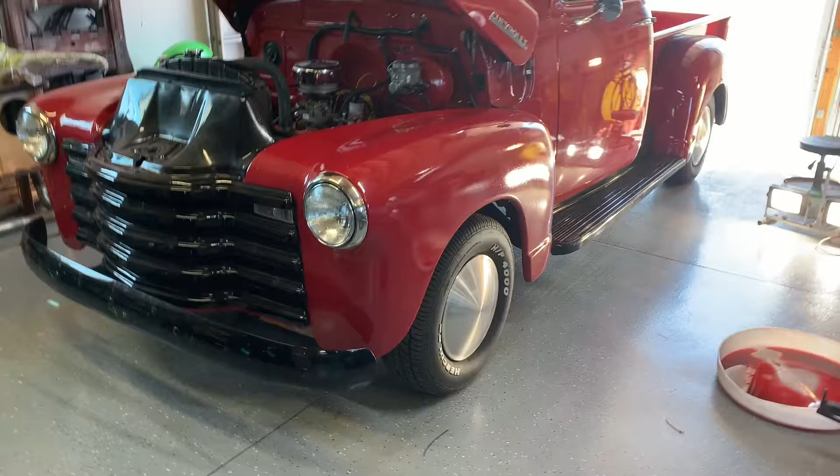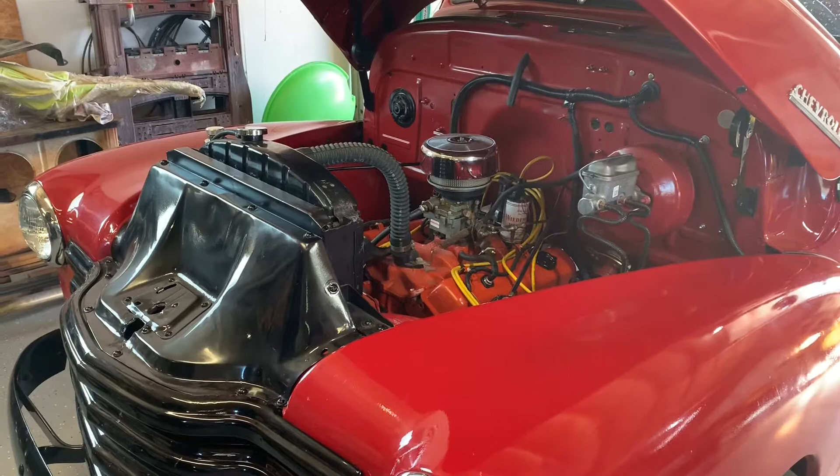Okay guys, well, it's been a month since my last video. Now, it didn't take me that long to get the transmission in. I had it in and bolted up in that first weekend of the original video, and I published it. So I got it the following weekend. I got it all buttoned up, got oil in it, and was driving it, and that's when I started having some issues.

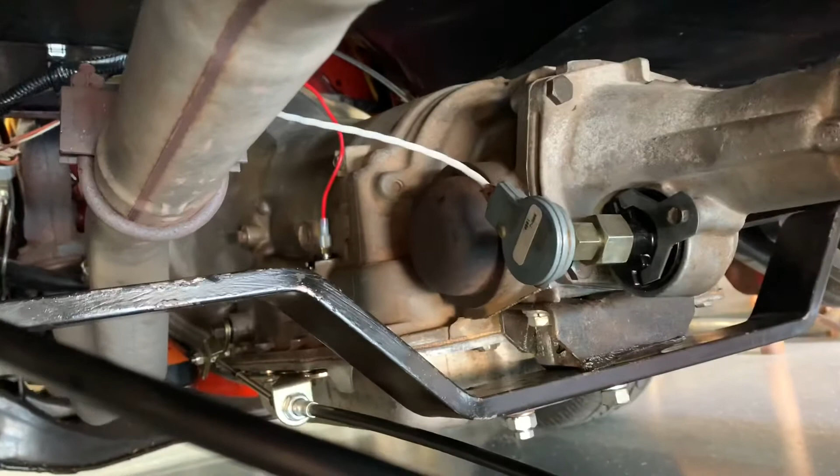I had a problem with my torque converter lockup circuit. Let's see if I can get this under here. You can see everything here. So you kind of see that red wire in the distance there. There it is. There we go. All right, so there's the red wire. That was a white wire. It's a 14 gauge wire with a 15 amp fuse, and it runs through a rocker switch on my dash with a LED light indicating that the circuit's got power.

This is the simplest lockup system that a person can do. They get complex after this, where it all does it automatically with vacuum switches and brake switches and all kinds of doodads.

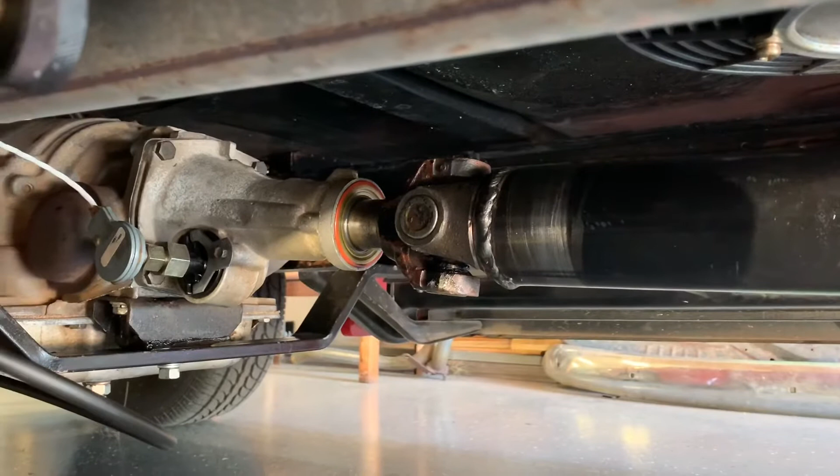But anyway, there's my drive line I got cut down. The transmission is 3 inches longer than the original Turbo 350, so it's kind of a neat thing with the 700R4s. They're all the same length. The Turbo 350, you could have 3 different tail pieces on here, you got like a short, medium, and long tail shaft. So I ended up having to cut 3 inches out of mine.

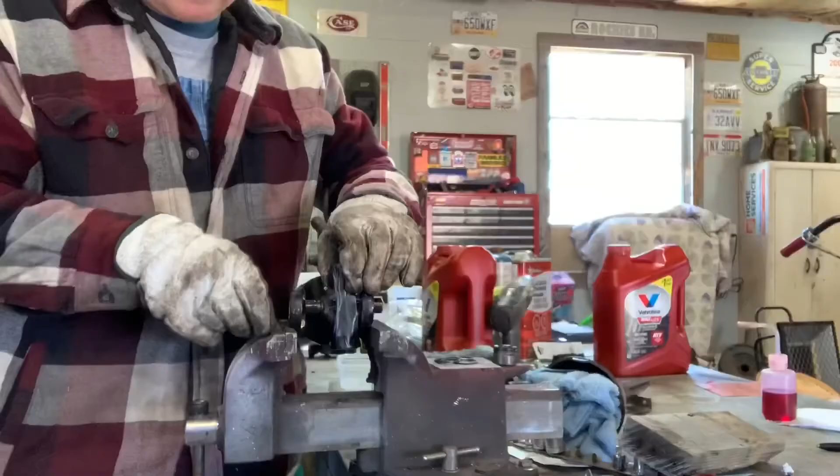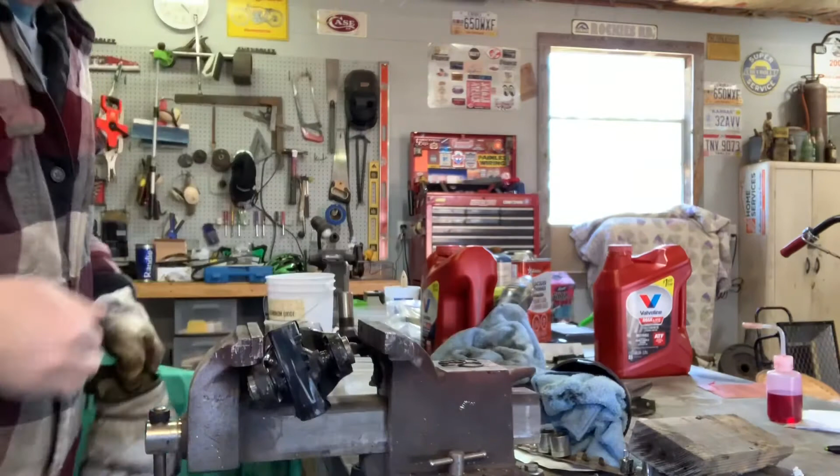All right, so here's some video of me just messing around with the U-joints and getting them put in. They're pretty simple to do. There's a lot of videos on YouTube on how to put U-joints together, and I wasn't real pleased with the way the video turned out, so I just thought I'd narrate a little bit of it here and show you guys how I did it. I used a vise and sockets and just kind of pushed everything together. So make sure your socket on the other end is bigger than your bearing cap.

And then you can put them in there and just tighten down on the vise. Sometimes you need a little bit of a cheater to give you a little bit of leverage. If you notice, my vise handle's bent a little bit there, and that's from me putting a cheater pipe on it and sucking them down in there. So you got a little C-clip that goes down into the back side of the bearing cap, and that kind of locks it in place and keeps it from pushing out. They go in real easy and snap in. So then you just flip it over and keep pushing them in.

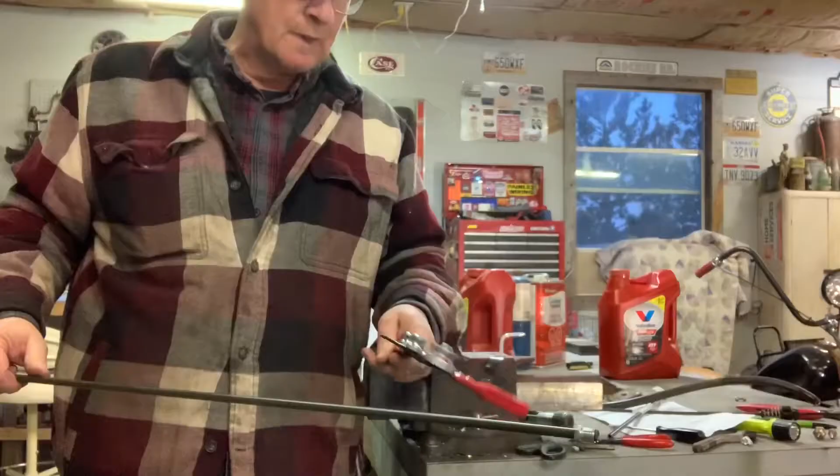Bending the tubing, that was a stretch for me. I only had a set of 1/4 and 3/8 benders, regular tubing benders. I went to O'Reilly's and got a cheap pair of their tubing benders, and then I put a mark on here at 11.5 inches, and I get my tubing bender in here like that, and I'm going to put that in about the center. Nothing works right on this thing, but anyway, I'm going to squeeze this down now and just go a little bit at a time.

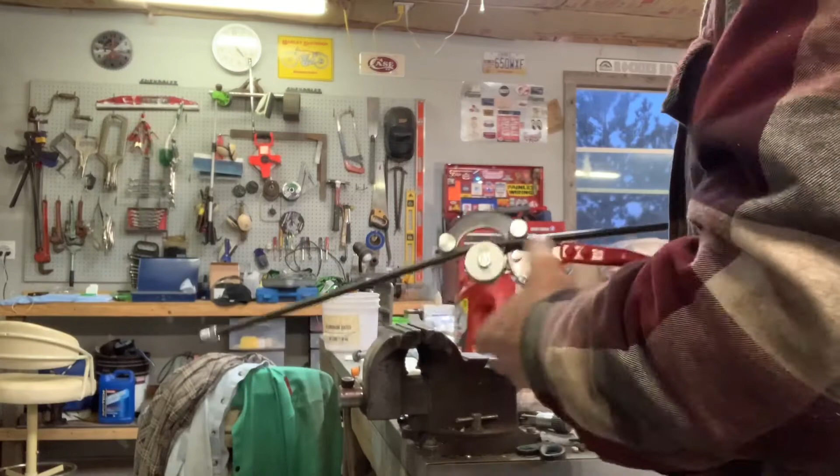I don't want to get too carried away with it. I'm going to move it just a little bit and just keep working it back and let the benders do the work here. I need to get a 45 on this. So I'm going to go up a little bit more. There we go. So I just moved my mark from the center this way a little bit. I'm just going to keep working it until I get about a 45 on it. I just don't want to crush that tubing. There we go. That's about 45.

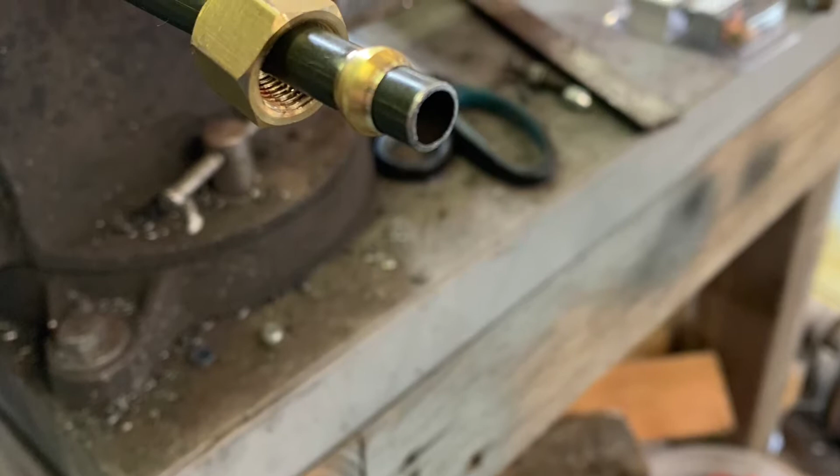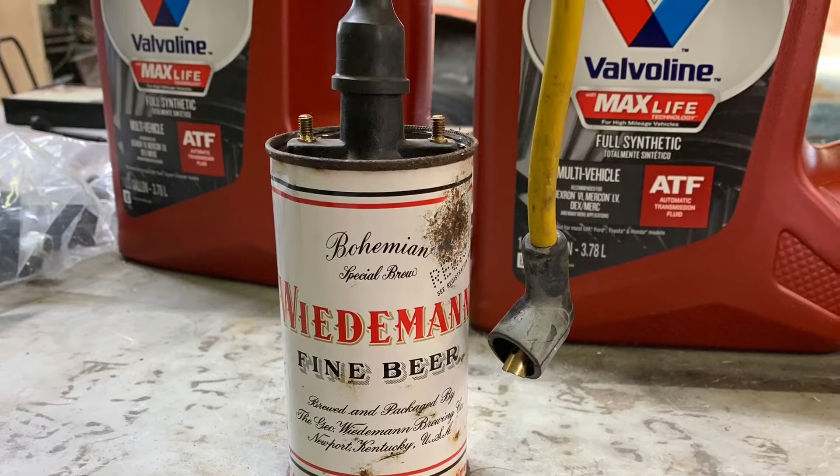I'm starting to smash the tubing now, so I don't want to smash it and restrict the flow. So I'm going to stop right there and I'll be able to hand form that once I get it on the transmission. This is just some pictures of the tubing, cutting it and reaming it and getting the compression fittings on. I needed a coil can cover, so I had this old beer can laying around the shop for a long time, so I put that on there for a coil can cover.

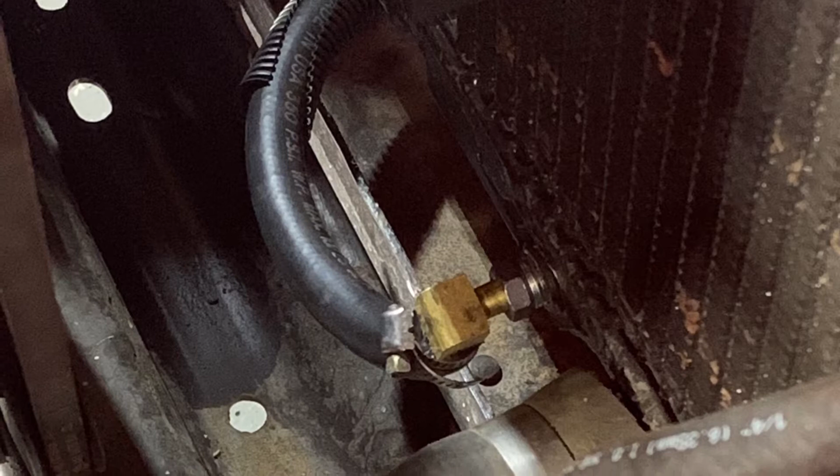So that tubing I was bending ran from the transmission down the frame rail up to the radiator, and those fittings there are the fittings to get from the transmission cooler hose to the tubing.

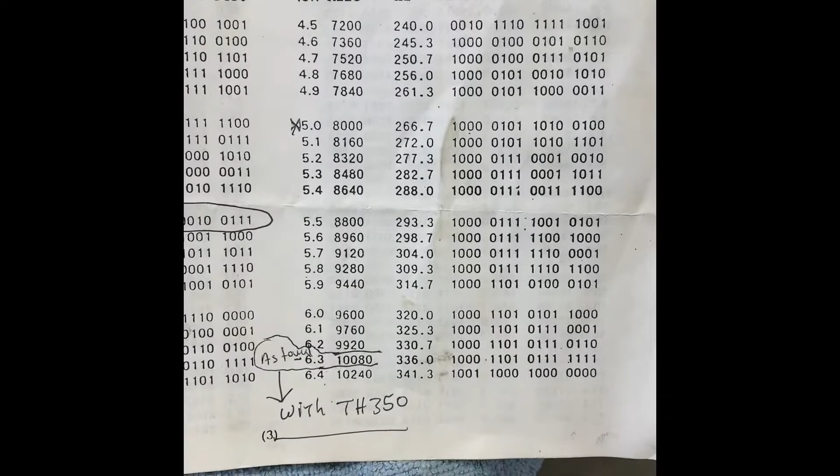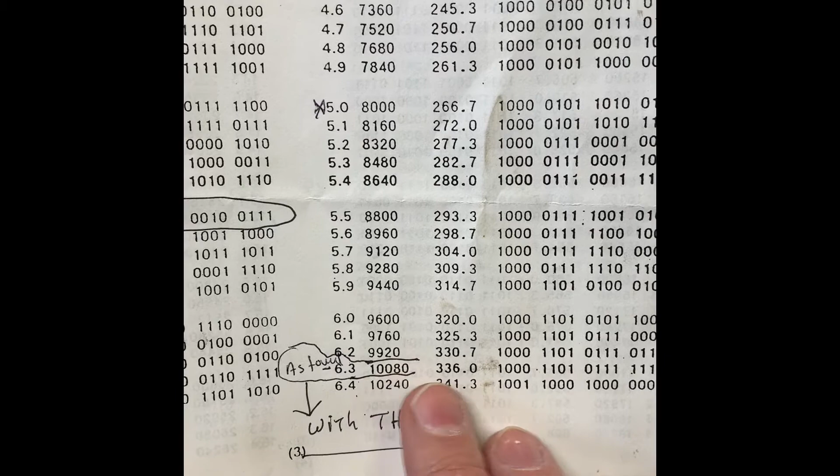So all right, guys, I have an electronic speedometer in here. I bought this a long time ago, probably 2000, 2005, somewhere in there. Anyway, it converts the mechanical speedometer to an electronic signal to the back of the speedometer. So when I pulled it apart and got my initial reading, this is my calibration chart here. With the Turbo 350, this was where I was at. So I had 10,080 pulses a mile. And then you set your dip switches accordingly like that. So this was my as found. So there's two ways to do this.

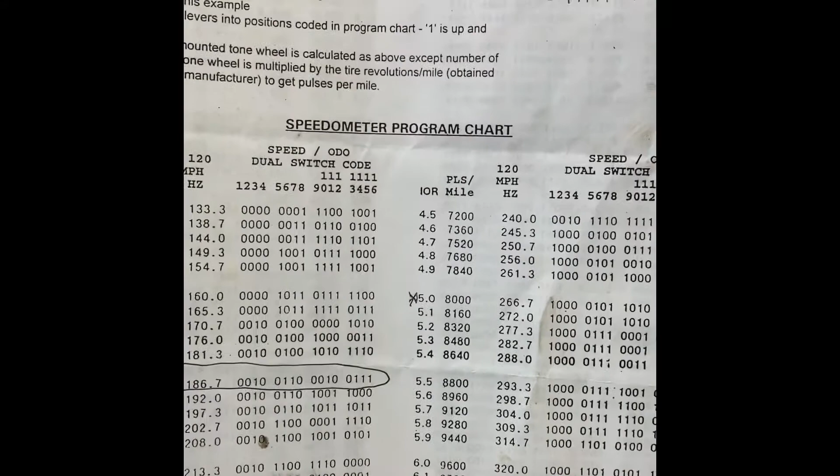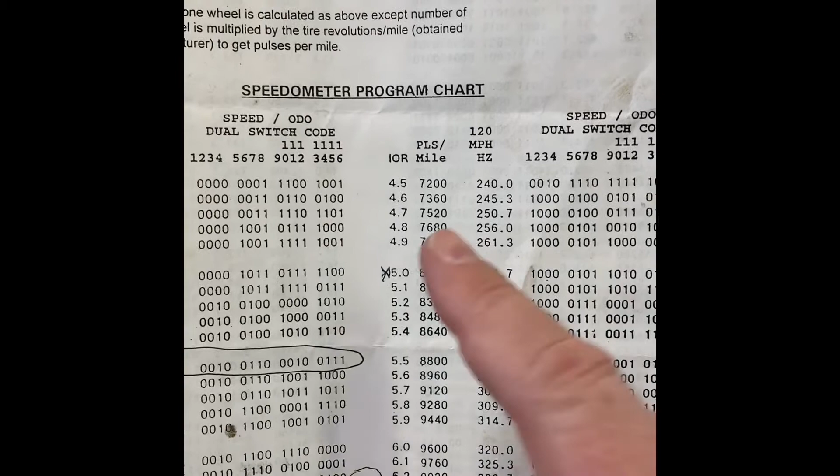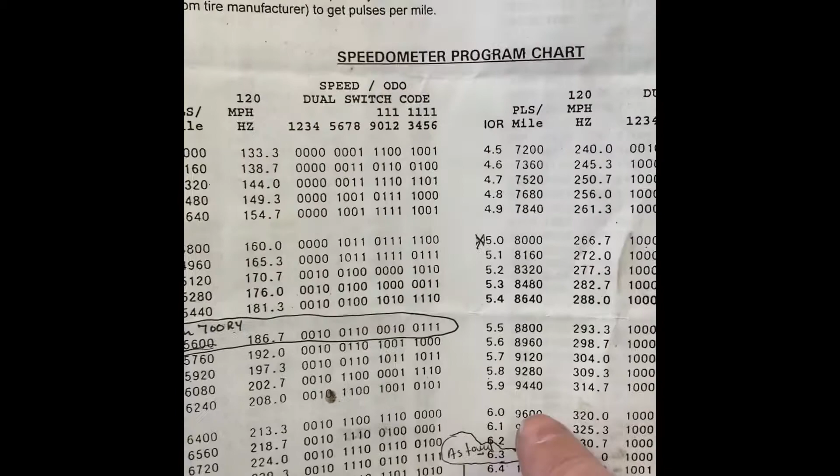You can drive a 5-mile course and document the mileage with another vehicle, and then take your test vehicle and drive it and record the mileage. And the difference of that 5 miles is these numbers here. So if you were over, you'd be 5.1 miles; your speedometer would have registered that. If you're under, then you would have been less than 5, so you would have been these numbers.

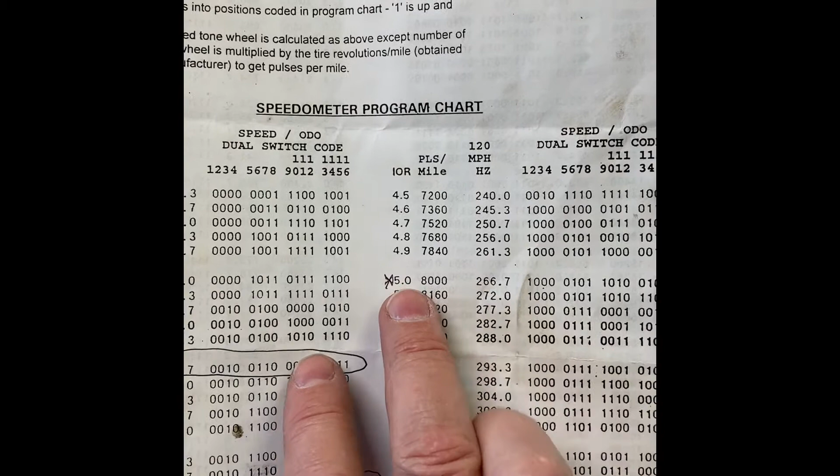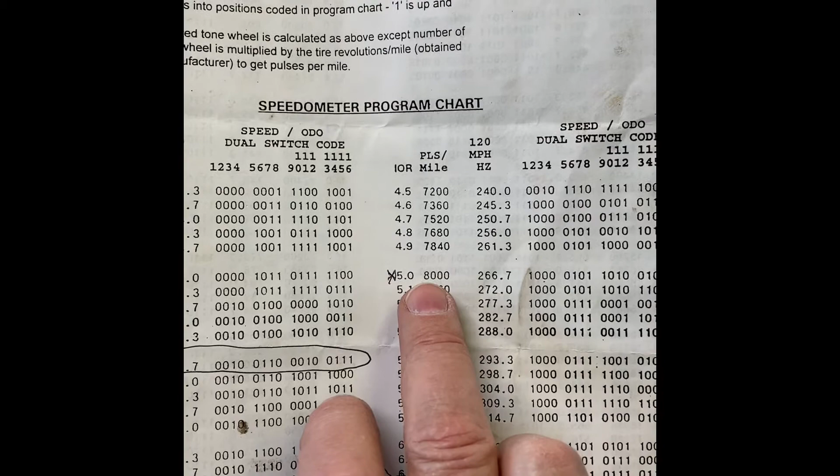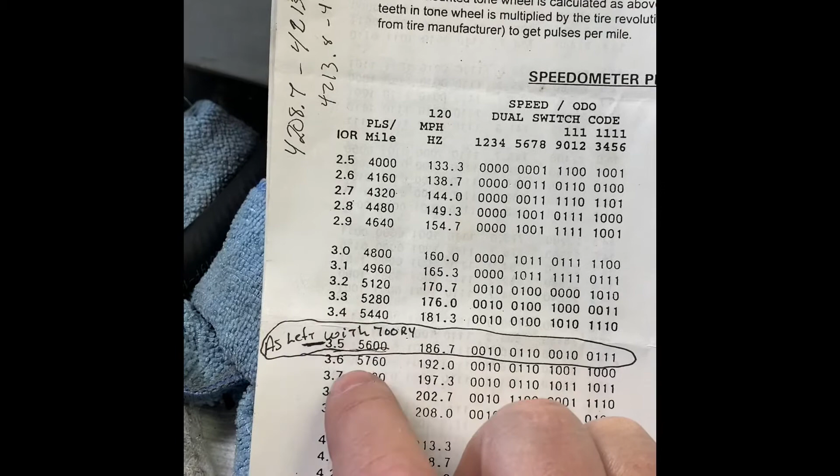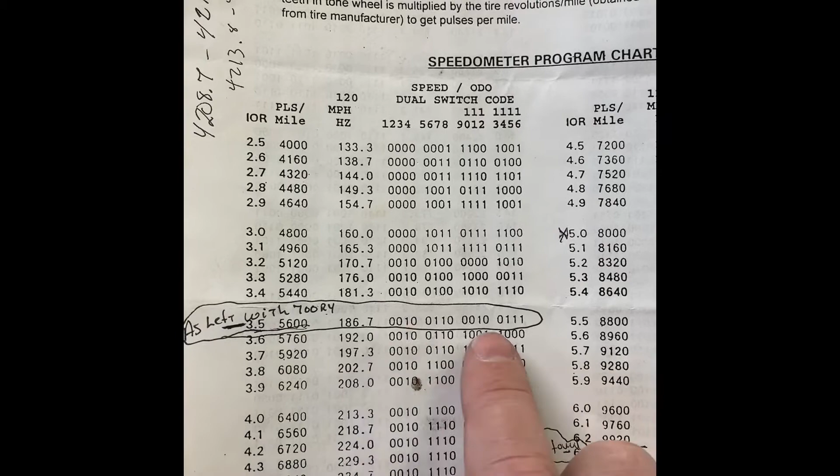So set your baseline at 5 miles. You have to go to your baseline. That's your initial calibration point, at 5 miles. It's 8,000 pulses. So I set my switches back to these numbers here, and then drove the course there and back twice. First time I had 3.4 miles less, and I had 3.6 less the last time. So I split the difference. Plugged those numbers in, took it for a drive, and I was done.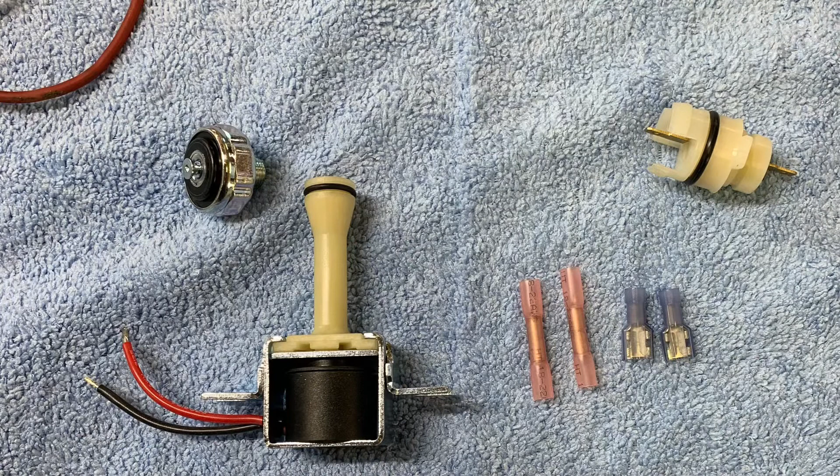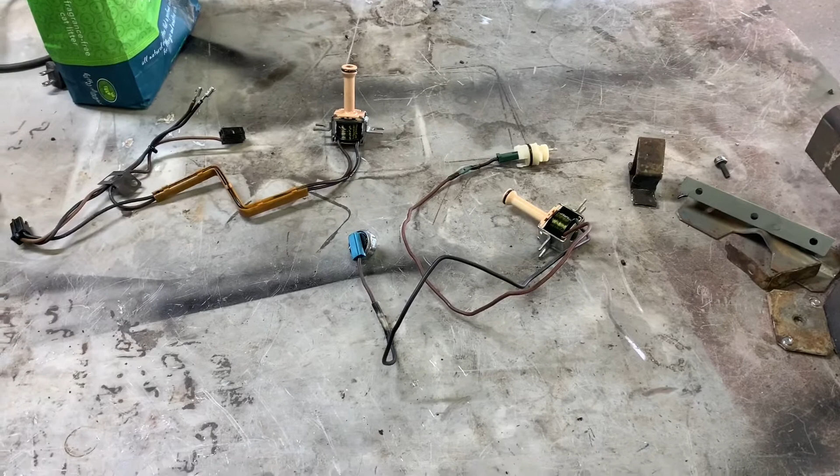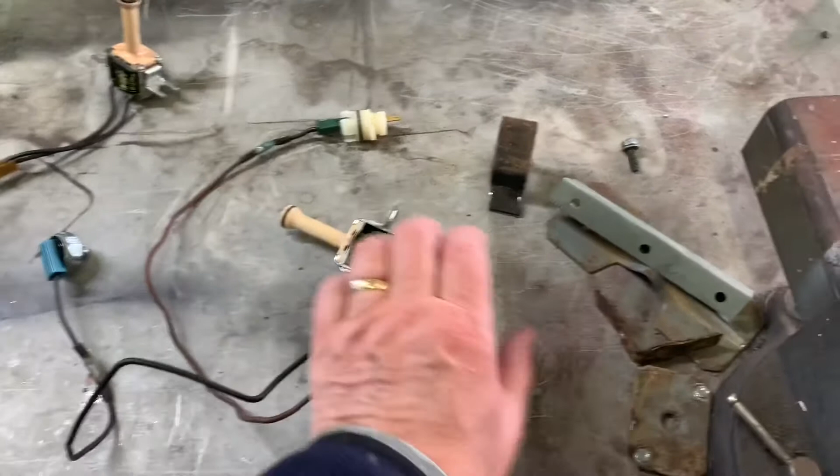So I ended up having to buy a new torque converter lockup solenoid. I just bought a kit, came with everything I needed in it. So this is what fixed my problem. Okay, so one of the major problems I had with this whole project was this little guy here. I've got two of them. I had one from another transmission, but this is your torque converter lockup solenoid. This is the simple circuit. This is how the guy that I bought the transmission from had it wired. You go to any YouTube video, and the simplest way to do this is to wire it just like this.

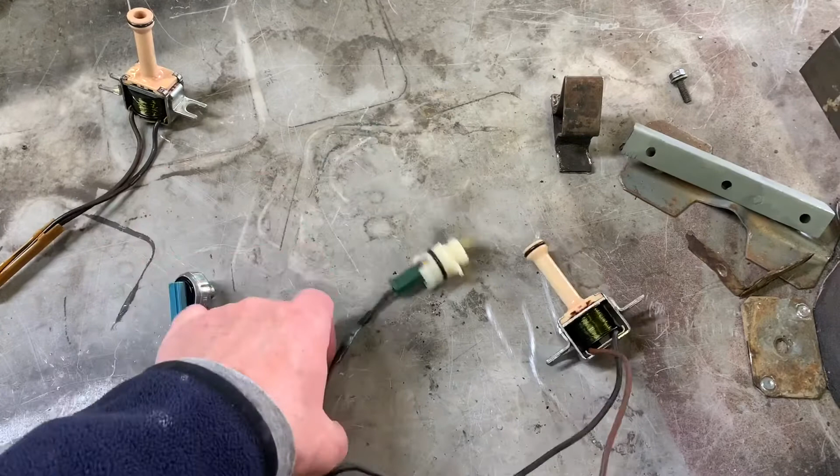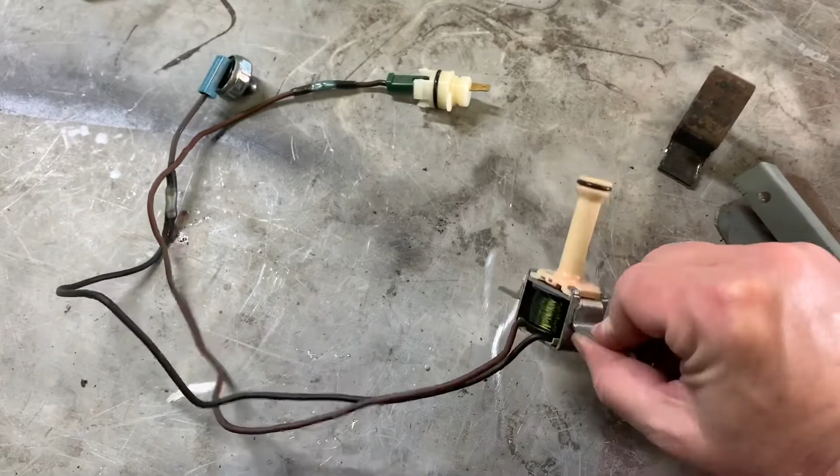So you have your solenoid, and you have the ground. The black wire is your fourth gear pressure switch, and then you have the pass-through. This is not the stock pass-through. Your hot wire, your 12-volt positive, comes in here. The solenoid is normally open, so it's bolted up into a passage there in the bottom of the transmission, and it's normally open. So there's fluid dumping through this solenoid and coming out this valve here.

So the way I've got mine wired is I've got 12 volts coming off the fuse block on a 14 gauge wire, 20 amp fuse. And I ran that to a toggle switch type device with a light. That light is kind of my trouble light, or circuit indication light that it's working. So when I turn the switch on, an LED light comes on, and I know I've got power down to the transmission. When I turn that switch on, it applies power here. It closes that valve

and directs the fluid directly to the torque converter, and it engages that circuit and makes the torque converter lock up. There's a pressure plate, or a clutch device, inside the torque converter. If you see it cut away, it's just another clutch in there, and that pressure pushes against that torque converter and it locks that clutch up. So this is the simplest, lowest cost way to have lockup on a 700R4 or your 200R4 from everything I've been reading.